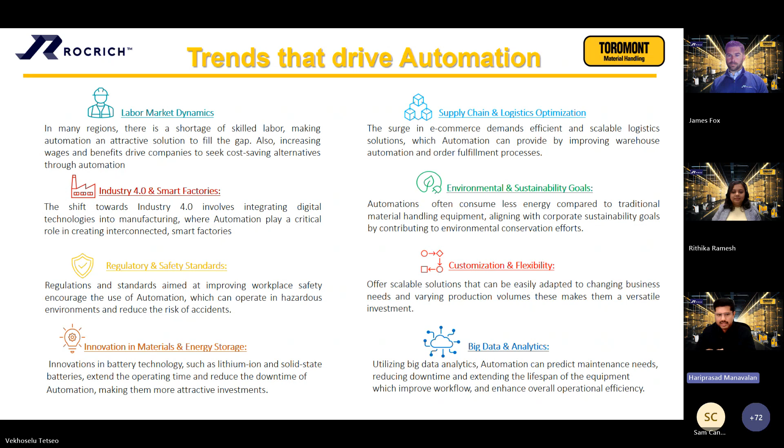The last but not the least is sustainability. With all the talk about carbon emission reduction and zero waste and all those initiatives many companies are embarking upon, to achieve today's sustainability targets like cutting carbon emissions, reducing waste, and optimizing energy use, automation is not just helpful, but it is essential. It helps in material handling route optimization, reduction in idle time, and optimizing charging functions for electric AGVs while extending the life of the assets.

Why automate? That seems to be a very obvious question based on the trends we saw, but there are some misconceptions we want to clarify. The common need for automation is increased efficiency and throughput. Most organizations are turning to automation for these reasons.

While it's a common perception that manual forklift operations can move more pallets per hour compared to autonomous solutions, the reality is that automation delivers far greater value through end-to-end process efficiency. Automated systems provide consistent, predictable, and reliable throughput with added benefits of scalability and enhanced safety, ensuring smoother operations and reducing risk across the board.

Another important reason companies automate is for accuracy and consistency. Automation enhances both, especially in repetitive and multi-shift operations, eliminating the reliance on skilled labor availability and addressing labor turnover, extensive training activities, or even concerns about safety like operator fatigue.

Automation also significantly enhances warehouse safety by eliminating many of the risks associated with manual forklift operations. Unlike human drivers, AGVs don't suffer from fatigue, distraction, or inconsistent behavior across shifts, making it an ideal solution for multi-shift and overnight operations.

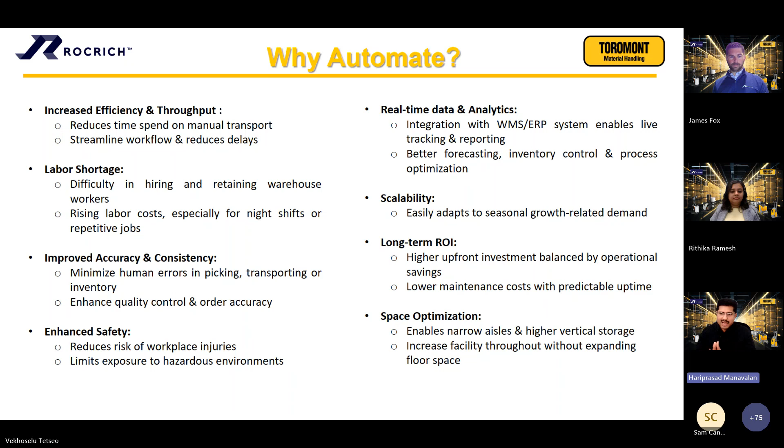Let's look at a few common workflows in a warehouse and then a manufacturing facility. When you look at a warehouse, you understand the common material handling flows.

The common material handling flows are truck unloading in the receiving area, then staging for putaways, then putaways for long-term storage and racking, then racking retrievals for replenishment of goods, racking replenishment for pallet picking, or racking replenishment for order picking from the pallet. Or even pallets moved from the racking location to the staging area and outbound, then dispatch through trailers. These are the common material handling flows.

Automation can be used in almost all of these applications. Either it could be an AGV stacker or an AGV reach truck which can do the job, or a combination of AGV stacker and autonomous VNA for denser warehouses, or even a combination of conveyor automation with an autonomous VNA solution.

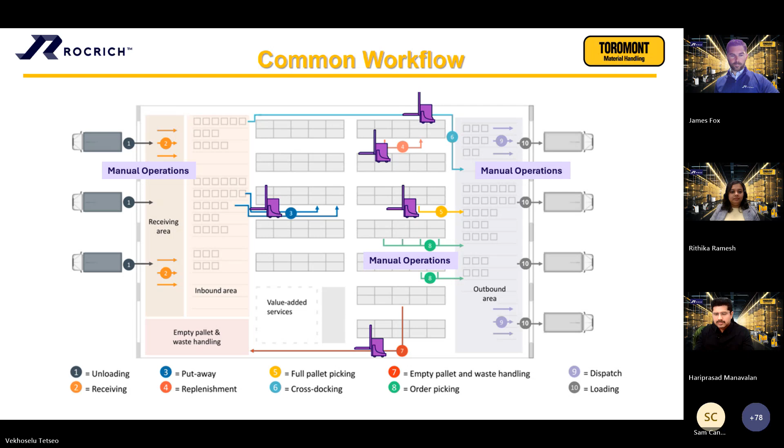Let's look at another example for a manufacturing setup. We have chosen a paper mill conversion facility just to show the complexity in the operations and how still AGVs can be used in this application.

The common workflows are from the receiving area, inbound to the processing area or inbound to warehouse, warehouse to the processing area, and then from the processing area or warehouse to further processing of finished goods and finished goods to outbound. This is the common workflow we see.

Here, the thing to note is there are AGVs available for handling difficult applications like rolls, which can come in different shapes, different sizes, different dimensions, and different weights. AGVs can handle all of them, and it also requires additional functions like rotation and tilt, so AGVs can also perform those functions seamlessly while being autonomous.

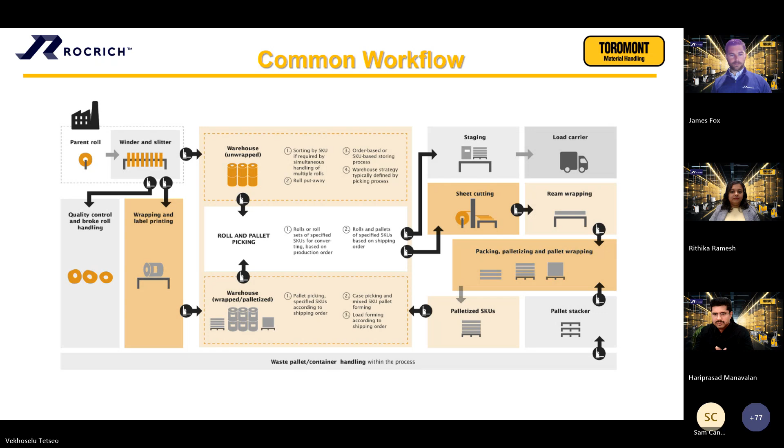So for any project, before we start, we have to do a feasibility study. For automation projects, common feasibility checks always include labor cost savings, but that's not the only thing companies look at. There are many things companies can consider to ensure the automation project has good feasibility and a better ROI and payback.

Just to give a broad example, if you have single shift operations and you're looking to adopt automation, you should expect a longer payback period. The more the volume and frequency of the material handling flow, the more the ROI using automation. For example, a two-shift operation could have an ROI or payback within 4 years, whereas a three-shift operation, a true 24/7 operation, would have a payback within 2 years.

So again, the basics are the more volume and the more repetitive the task is, the better automation works, and the more labor intensive it is. It's also advisable for customers to look at other process inefficiencies, order fulfillment inefficiencies, product damages, and safety risks posed by manual operations, because those help in building the right feasibility study and ROI for your automation project. Last but not least, automation provides strategic value for scalability and future growth, which also has to be taken into consideration when looking at ROI for automation projects.

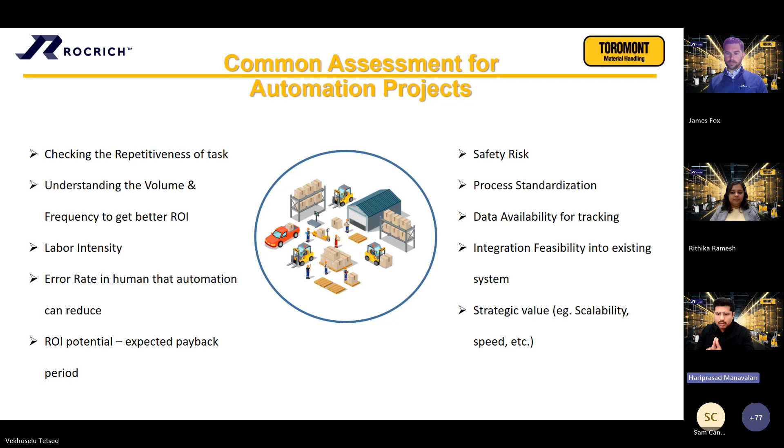Thank you, Hari. In a moment I'll get into more detail on who Rocrich is and explain some details about our portfolio and our solutions in general. But we'll start out by highlighting a couple of points from a recent customer case study.

This was a 3PL for a confectionery customer in the food and beverage space. This project was recently deployed, going live earlier this year in April, so it's been live and running full steam for the last few months.

In terms of the customer's requests and goals for the project, they wanted to reduce their manual labor and dependency on manual labor for the movement of goods throughout the process, as well as reduce damage and loss of product due to manual handling of the goods.

It was also important for them to integrate the system into their existing warehouse, minimizing the impact on their daily workflows. Efficiency, reliability, and safety were particular concerns and important points for the customer with this type of system.

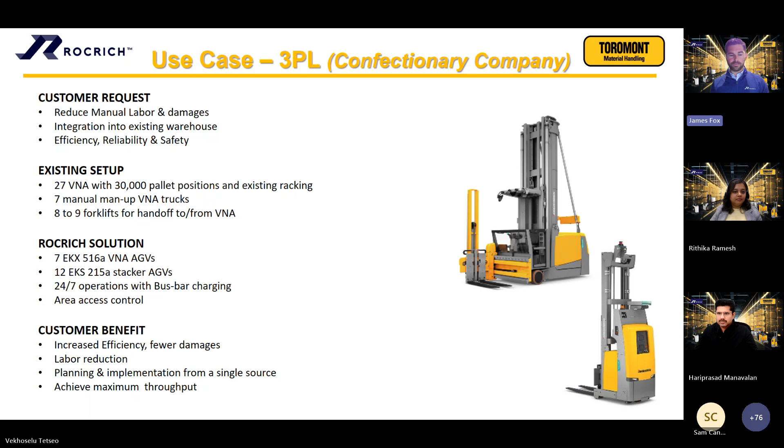Some of the customer benefits that have been realized are increased efficiency, fewer damages to the loads, and a significant reduction in their manual labor as part of this process. Planning and implementation from a single source was a benefit they received between Rocrich and our network of partners to implement the solution. And due to some of the other points I mentioned earlier, they were able to achieve maximum throughput and a very high level of throughput out of that type of system.

Thank you for sharing, Hari and James. Now let's talk about challenges. We know that automation can be exciting, but it also has its fair share of hurdles. Take a moment to let us know what your biggest challenge is when it comes to automation - it could be budget, integration, or just figuring out where to start. We would like to know. I'll launch a poll shortly.

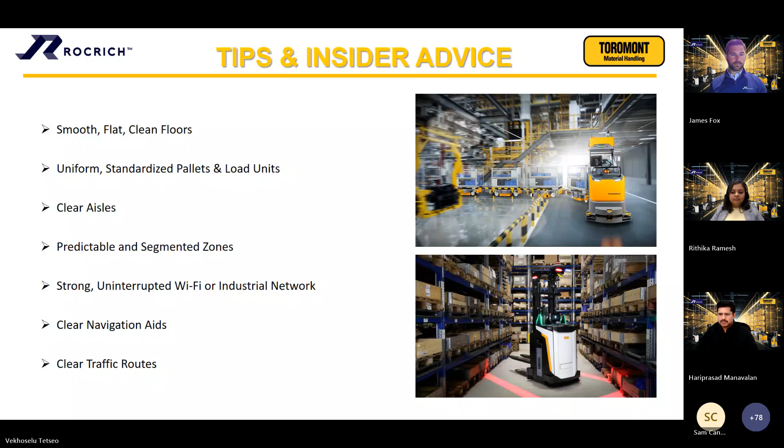One thing that's definitely important to note is that with an AGV or an automation solution, it's not just about the truck and it's not just about the hardware. That's one aspect of it, but the more important aspect of a solution for automation is going to be on the software and the integration side and everything behind the scenes, and how we integrate with your existing systems and processes.

So when we talk about system software, that's the brains behind the machine, and the software orchestrated in the background is helping to determine particular routes, priorities, and task assignment, as well as order management and task allocation to the appropriate truck within the fleet to complete that task. Also, real-time decision-making, some capabilities for systems to be adaptable to delays and changes in your process, and priority changes - with prioritization rules of tasks built into the software side of things to help with that.

Also, having data available at your fingertips - data for various system KPIs, utilization rates, performance rates of the trucks and the system. That type of data is available, and there's a number of different reporting tools and dashboards that are offered with our systems and are part of our systems, so you're able to track that and pull it up at any given time. And then in terms of being an integration powerhouse, the software and the level of integration can be across a spectrum.

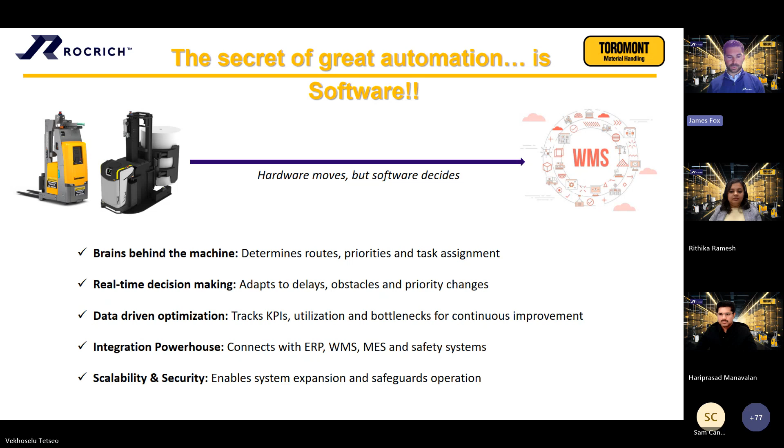So now to provide a little bit of overview on Rocrich and then start to get into our portfolio and talk about our trucks as part of the systems. Rocrich is a joint venture between two global leaders in the material handling space. We have Rocla, which is part of the Logisnext group, and then we also have Jungheinrich. Each of these manufacturers of material handling equipment and automated vehicles are our direct parent companies, and Rocrich serves as the arm for both those companies to offer these solutions in the North American market.

One particular important thing to point out here, a bit of a differentiator, is the 570 plus partner locations across North America, with Toromont and all of their branch locations being a prime example of our strong partners in Canada serving that market. That vast network of partner locations allows us to offer local service and support, local maintenance support for the systems that we implement and install.

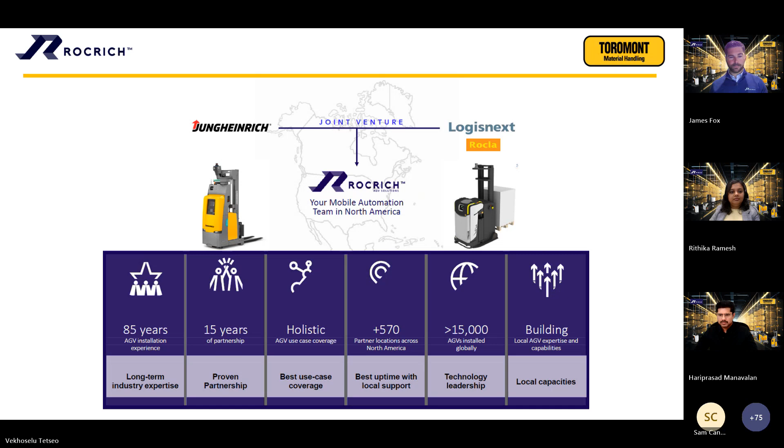Just kind of highlighting some projects in terms of a footprint of our install base. The Jungheinrich and Rocla names are global material handling providers and manufacturers. From the global standpoint, we're talking automated vehicles and AGVs, more than 15,000 in operation worldwide. And as we turn specific to our North American market, we have over 400 vehicles in operation across North America, spanning more than 60 plus project and customer sites. You can see some examples throughout the Montreal and Quebec area, as well as in and around the Toronto and Ontario area, as well as the other blips seen on the map there.

Also important to know about Rocrich is that our core team members are comprised of sales folks such as myself, as well as the operational execution team members. We have automation engineers, commissioning engineers, software engineers, as well as service and support engineers and technicians that are all part of our core team. We're involved in every aspect of the project, from design, implementation, and commissioning of the systems, and the after sales technical support, in conjunction with our strong partners like Toromont for maintenance and everything else from the after sales side.

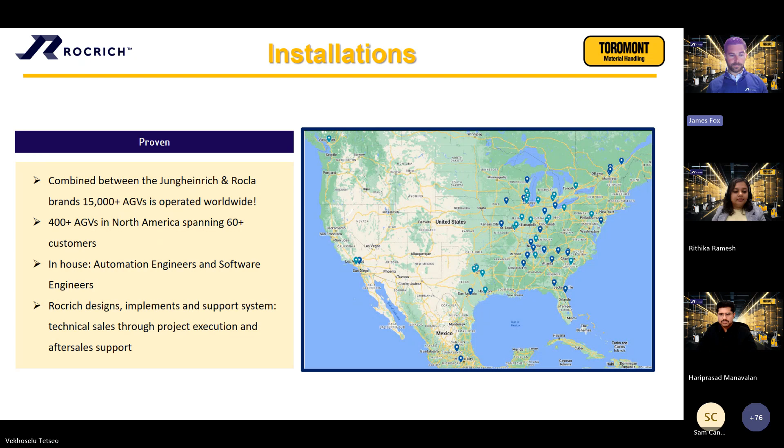Now we'll get into a little bit about the portfolio. We'll highlight some examples of use cases and application scenarios where our vehicles fit into within your facilities. We have vehicles that can handle goods, transferring goods from conveyor to conveyor locations, and picking and placing goods onto conveyors. We have a number of different fork style vehicles that can handle loads and goods delivered or picked in a block storage environment or deep lane environment, as well as capable of load on load stacking in that type of environment.

We also have some vehicles that have specialized clamp attachments that can handle unique loads like paper rolls, large roll type goods, and other clamp attachments as well. Also towing, and then our fork style vehicles can handle put away or pick and drop tasks interfacing with a number of different racking configurations, whether that's rows and aisles of single selective rack, gravity rack, or drive-in rack. We can explore all of those types of solutions. And then also VNA, highlighted in the bottom middle there - the very narrow aisle, high density storage. We have some turret trucks for those types of environments.

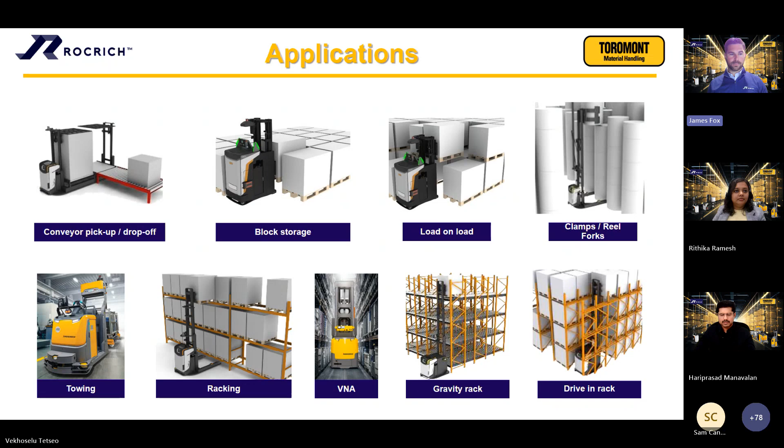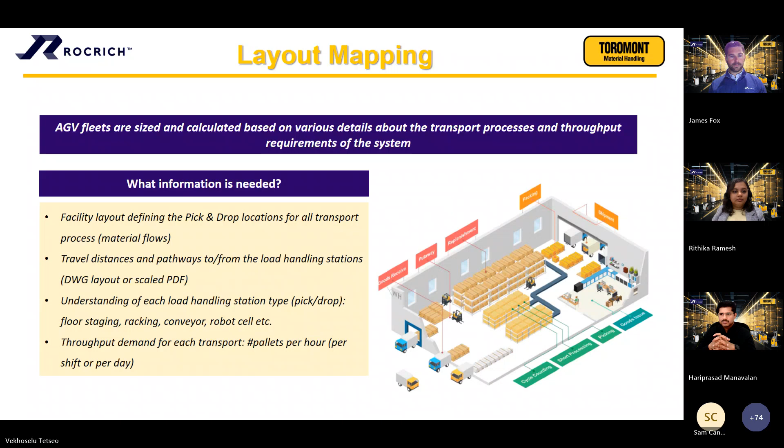Also very important in any automation project is understanding all the details of the load being handled by the vehicle. First and foremost, safety is most important, so we evaluate at a deep level all the nuances of the load or loads within scope to automate, ensuring our solution can handle them safely and repeatably. You can see the example measurements of a palletized load—dimensions and details of both the pallet and goods, and overall weight—are important for us to analyze and collect through discovery and conversation as we evaluate your site. Photos of your loads are always helpful to receive.

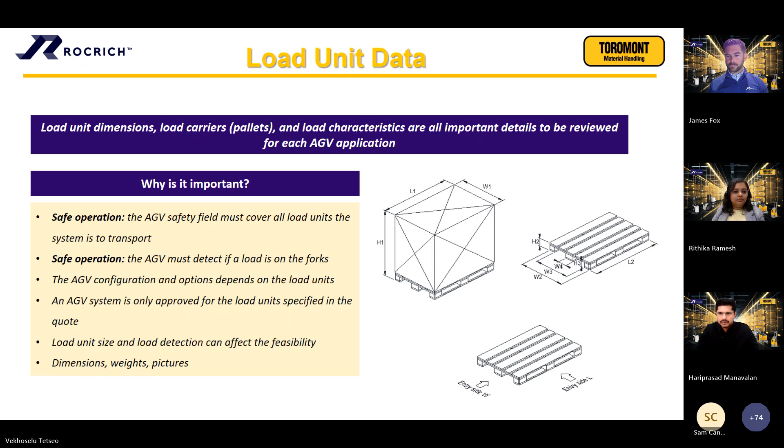Thank you, James, for an insightful overview of the case study, the AGV portfolio, and the key steps in the customer automation journey. At Toromont, we are proud to be the Canadian partners for Rocrich AGV Solutions.

Toromont is a publicly traded Canadian company with $5 billion in annual revenue, structured into 6 distinct divisions: Toromont CAT, one of the largest Caterpillar dealers globally focused on construction and mining; Toromont Energy, specializing in supply and maintenance of power plants; Battlefield and Job Site, our two equipment rental organizations supporting Eastern Canada; CIMCO, a leader in refrigeration solutions; SITECH, our technology-driven division focused on remote condition monitoring, machine control, and telematics; and Toromont Material Handling, dedicated to delivering comprehensive material handling solutions. We have 7,700 employees across Toromont, operating across 165 plus branches in 8 provinces and 1 territory, with a strong emphasis on product support.

Toromont Material Handling is the official dealer partner for LogisNext Americas, headquartered in Houston, Texas. Within this division, we offer a comprehensive range of forklift solutions under the Caterpillar, Mitsubishi, Jungheinrich, and Unicarrier brands. Toromont entered the material handling space through the acquisition of Hewitt Material Handling in 2017, and since then we've made significant investments, consistently being recognized as a dealer of excellence by LogisNext. We provide sales and service for new and used equipment, backed by a rental fleet of over 2,000 plus units in Eastern Canada.